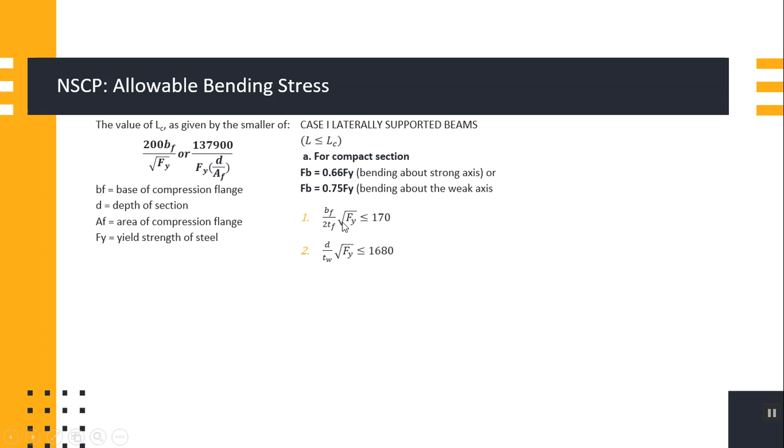The requirement is that BF over 2TF, square root of Fy, should be less than or equal to 170. If either of these two cases is not satisfied, we move to letter B.

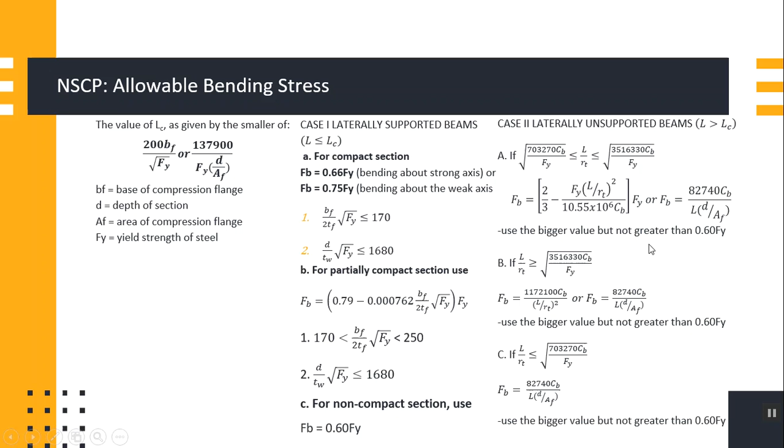If you check, there's a note: use the bigger value but not greater than 0.60 Fy. We'll apply that later.

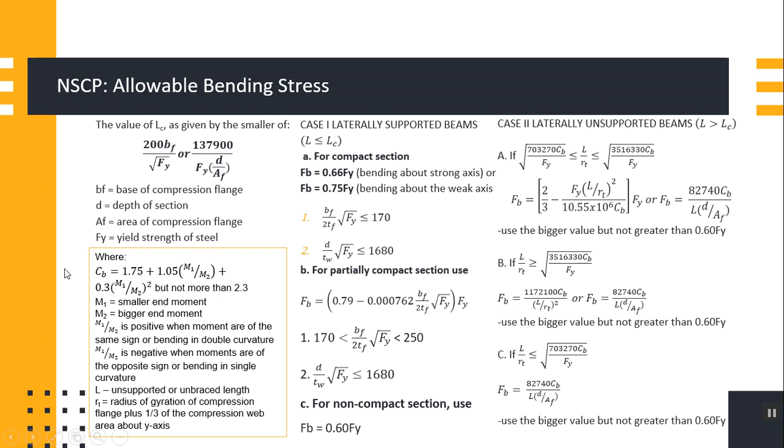Next, let's proceed to sample problem number 1.

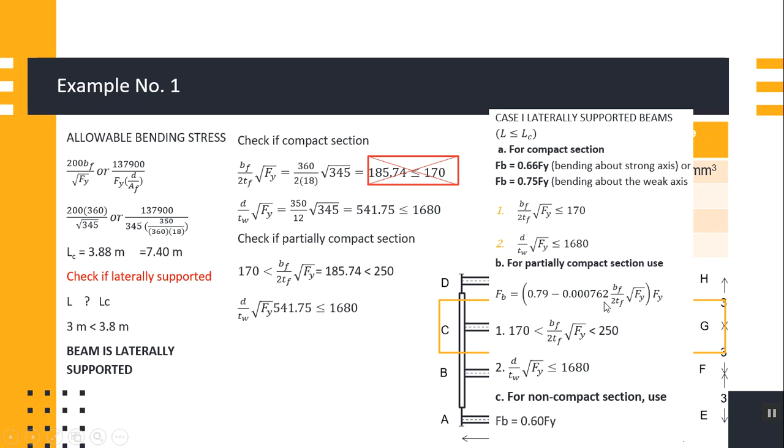At dahil partially compact section yan, ang magiging formula mo for allowable bending stress ng number 2 is ito: FB is equal to 0.79 minus 0.000762 BF over 2TF square root of Fy, times Fy.

Use FB. Next, yan, 0.79 yan. Yung BF pinalitan ko ng 360. TF is 18, Fy is 345. Simplifying further, ang FB mo sa number 2 is equal to 223.72 MPa. That is your final answer.

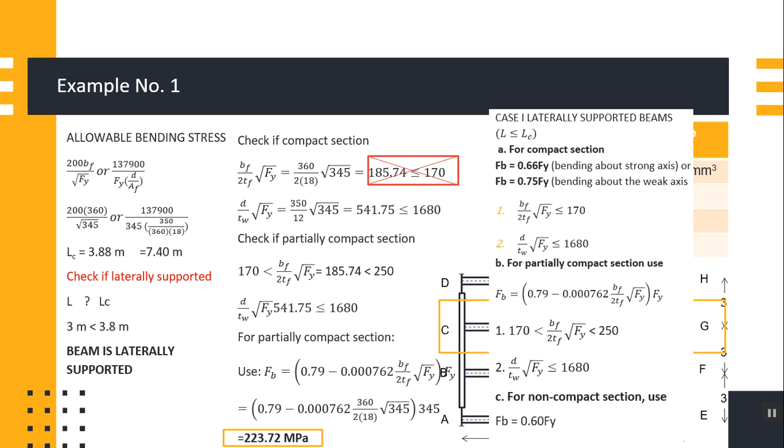Sa number 2, next let's go to number 3. Ang hinahanap sa number 3 is kapag laterally supported naman siya sa gitna lang, sa midspan. So 10 yun ha, tandaan nyo yung sa number 3, length is 10. Tapos kung titignan nyo, midspan, ibig sabihin ang actual length nyo dito magiging 5.

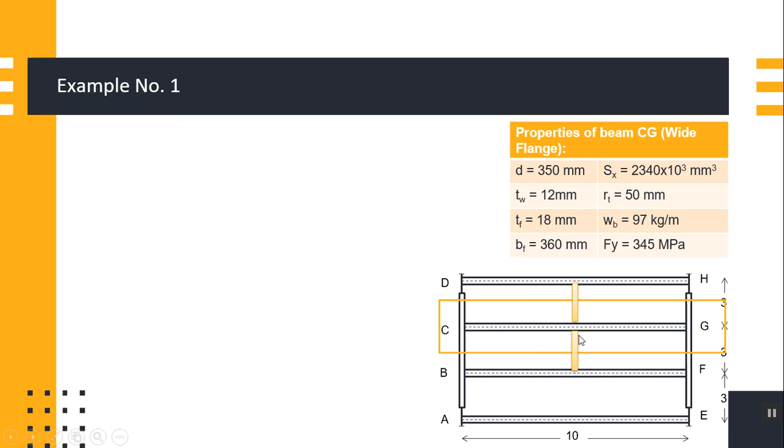So check natin kung laterally supported o hindi. 5 meters is greater than 3.8 meters, meaning sa case 2 tayo, laterally unsupported, case 2. So dahil dyan, check if intermediate beam agad, dito na tayo agad, tingnan natin.

Yan, ito yung gagamitin muna natin sa letter A, yung 703,270 CB over Fy less than or equal to L over RT. Substitute nyo na, CB is 1, Fy is 345, L is 5, so ginawa ko siyang millimeter kasi millimeter lahat ng nandyan: 5,000. RT given yan, 50.

Tapos CB given ulit na 1, Fy is 345. Lagay natin dyan yung mga sagot, calculate natin, calculate nyo to, calculate nyo yan. So ang sagot dito is 45.15, ang sagot dito is 100, ang sagot dito is 100.96.

So check if tama. 45.15 is less than or equal to 100, tama. And 100 is less than or equal to 100.96, tama ito. So sa una pa lang tama siya, ibig sabihin ang ating number 3 is intermediate beam, proceed na tayo dito sa formula ng FB na to.

Dalawa yan ha, is either ito or ito. So FB is equal to 2/3 minus Fy L over RT squared over 10.55 times 10 raised to 6, CB Fy. So yan, substitute lahat. Hindi ko na sasabihin, simplifying further, ito yung magiging sagot, 117.18.

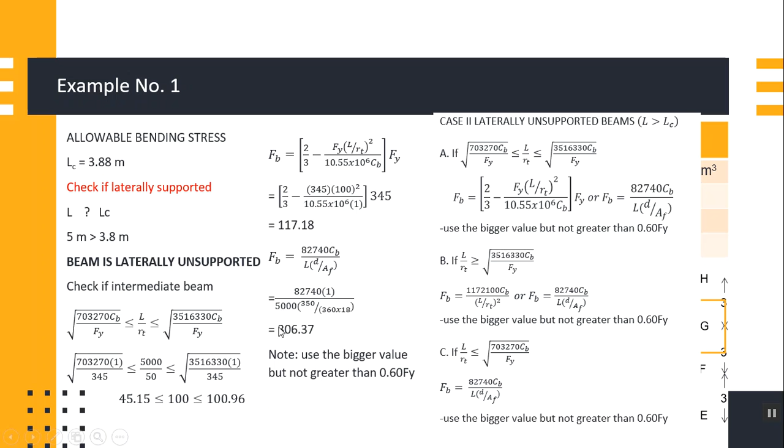So hindi pa nagtatapos dyan, i-check pa natin yung 0.60 Fy. Check natin, check yan lagi. Note, use the bigger value but not greater than 0.60 Fy. So kung titignan nyo, check muna natin ha, alin ang mas malaki, 306.37. Pero i-check natin tong 306.37 kung hindi siya nag-exceed sa 0.60 Fy.

So tignan natin, 0.60 times 345 is equal to 207 MPa. Ang sabi niya dyan, hindi pwedeng lumagpas sa 0.60 Fy. So sa haba-haba ng solution natin, ang magiging sagot lang din pala is itong 207 MPa. Yan yung final answer sa number 3.

So ayun, madali lang naman siya kung may kung meron kayong notes. So panigurado namang open notes kayo sa exam, sa quiz, ganyan. So tignan nyo na lang, i-check nyo na lang siya. Madali lang naman, procedural. Sana yan ay may naintindihan kayo.